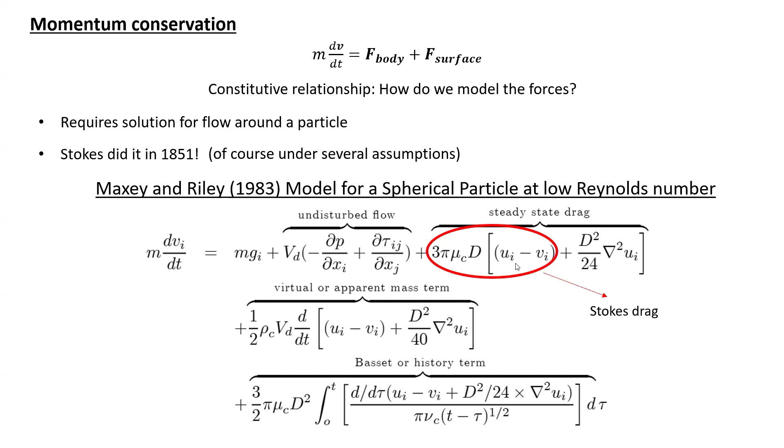In the previous class, we started our discussion on momentum conservation for single particles. We have seen that in the Maxey-Riley model for a spherical particle at a low Reynolds number, apart from the conventional drag force, which is Stokes drag, there are many other terms. So apart from drag and gravity, there are many other terms which influence the particle motion, and they include the force due to the undisturbed flow, then due to acceleration of the fluid, which itself comprises two terms. One is the virtual or apparent mass term, and the other one is the Basset or history term.

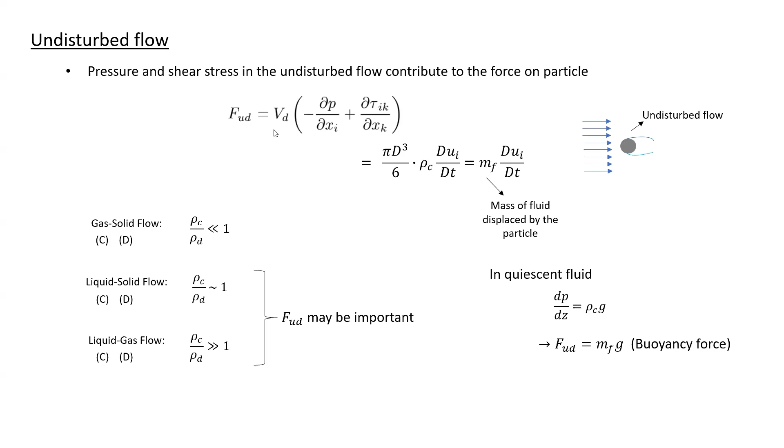So the undisturbed flow, first of all. In this case the gradient in pressure or shear stresses in the undisturbed flow contributes to a force on the particle as expressed by this expression. And here we see that this force is important when the mass of fluid displaced by the particle is important, and this happens when the densities of the carrier phase and the dispersed phase are comparable to each other, or the carrier phase density is much larger than the dispersed phase, for example in bubbly flows.

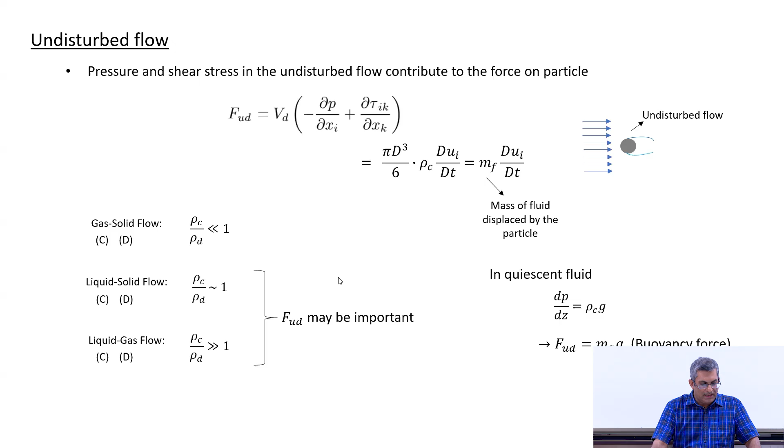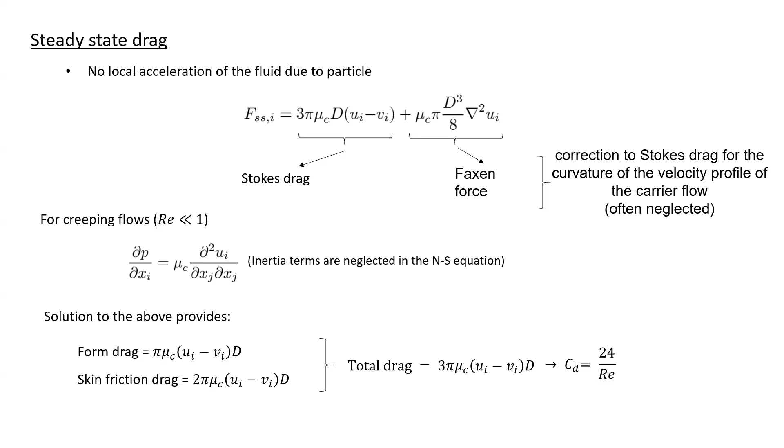Then we discussed the steady state drag. By steady state drag, we refer to a condition where the fluid is not accelerating due to the particle motion. So if, let's say, you drop a steel ball in a liquid, then as it moves down, it causes acceleration of the surrounding fluid. But here we are assuming that there is no such acceleration, and the steady state drag basically depends on the relative velocity, where u refers to the velocity of the carrier phase where it is not disturbed. So here we are not considering u in the boundary layer, but outside the boundary layer.

So for example, in this case where the ball is dropping in the liquid, the velocity can be considered as 0 because the liquid is not moving, but in reality it is not true. Some of the liquid is actually moving. So this is the steady state drag. Although we have Faxen forces which correspond to the gradient in the velocity profile of the carrier flow, this is often neglected because the particle size is much less than the length scale over which this gradient is significant.

From the Stokes solution, we can show that this drag is equal to 3 pi mu times the relative velocity times the size of the particle, and the coefficient of drag is equal to 24 by Re, where the Reynolds number is much less than 1. Only for this case can we solve the Navier-Stokes equation after simplifying it, and show that the total drag, which consists of the form drag and the skin friction drag, is equal to this. So the drag coefficient is 24 by Re, as we have used earlier also.

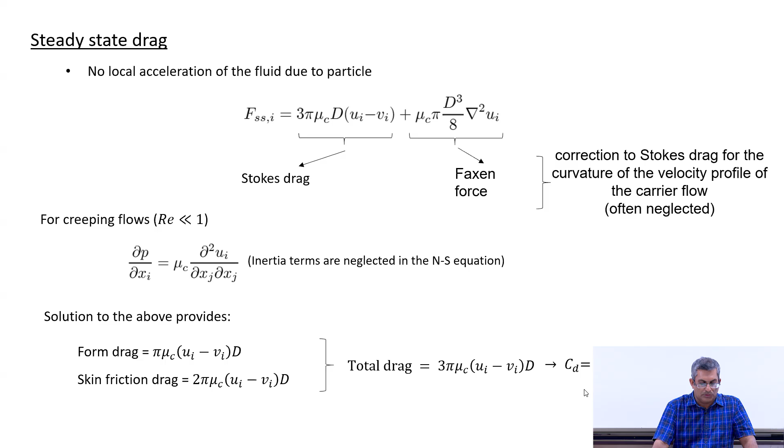Next, how do we correct Stokes drag? There are various factors which influence the drag. So how do we account for that? For example, the Reynolds number effect: the equation for the drag force that we have just discussed is valid only for the low Reynolds number case. So what happens if we have a high Reynolds number? In that case we can introduce a correction factor to the coefficient of drag. Various models are available depending on the range of the Reynolds number.

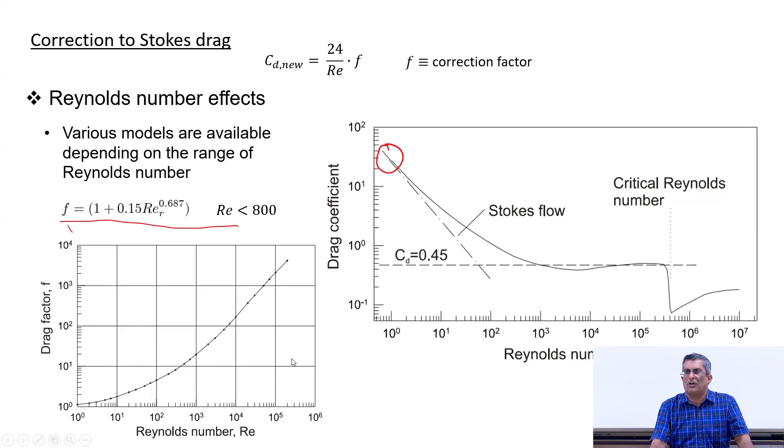So obviously when we have low Reynolds number, then this tends to be 1, but this correction factor increases as we increase the Reynolds number. Now this is about the Reynolds number effect, but before we move on, it is important to look at this parameter known as terminal velocity.

So what is terminal velocity? I am sure you would have encountered this earlier. This is basically the final velocity attained by a particle when it falls in a quiescent fluid. So what is meant by final velocity? Consider a particle which is falling in a quiescent fluid, the velocity of the carrier phase is 0, and one particle is simply falling under gravity.

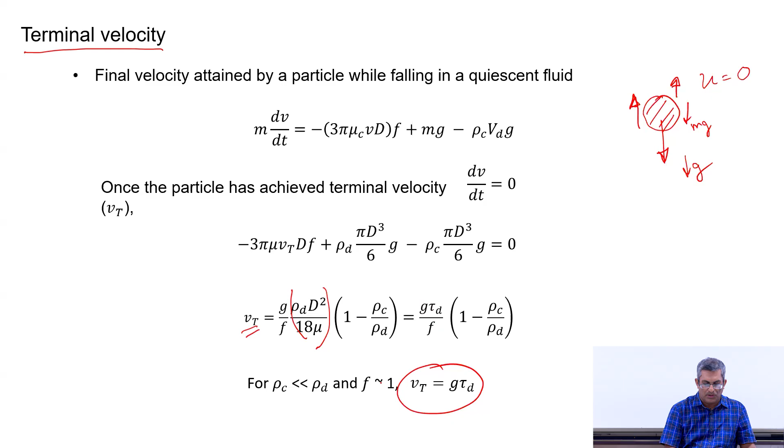Next, there are various other factors which influence the force on a particle, and we take that into account by this correction factor. We have seen that the correction factor for the drag coefficient depends on Reynolds number, but apart from Reynolds number, which other parameters influence it? That is what we are going to discuss. If we get an appropriate expression for the correction factor, we can take that effect into account. So first, effect of turbulence.

If a flow is turbulent, the turbulence itself will affect the drag on a particle, which we didn't take into account in Stokes drag. The question is, under what condition will the turbulence effect be prominent? There are basically two parameters which influence this. The first one is relative turbulent intensity. We'll discuss particle turbulence interaction later in this course in more detail.

The first parameter compares the typical turbulent fluctuations. You can consider u dash as the standard deviation of the velocity at any point, which represents the fluctuating velocity. And you normalize that with the relative velocity between the particle and the carrier phase, which we also call the slip velocity.

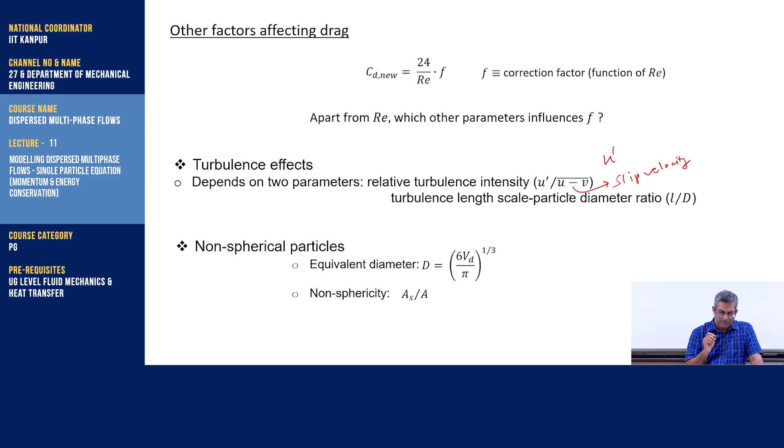factor in case of turbulent flow is that you have a spectrum of length scales and time scales, which are basically corresponding to eddies of different size. You have large eddy, you have small eddy, and the eddy size reduces. Okay, the smallest eddy is called Kolmogorov eddy. Okay, and the large eddies scale with the geometry of the flow.

So now the ratio of the length scale of the eddy to the particle size is another parameter which also affects how turbulence would affect your flow. So if the particle size is much less than the smallest eddy length scale, for example Kolmogorov scale, this means that the effect of turbulence might not be significant.

But if the particle size is scaling with the large scale eddies of the flow, then you can have an effect. So for example, if we consider a jet flow, if you have particle size which is comparable to the radius of the jet, then the effect of turbulence will be significant. However, there is no generic model which would describe this correction factor for all cases, because it depends also on the ratio of particle size to the eddy length scale.

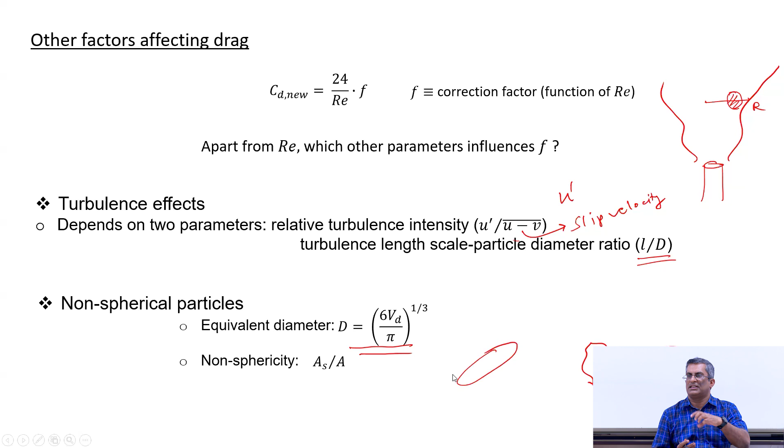And also the other parameter is the degree of non-sphericity. You can do that as far as the degree of non-sphericity is close to unity. The degree of non-sphericity is how much it differs from a spherical particle. Let's say you have a disc shaped particle. Then the straightforward use of Stokes drag will cause error, so you need appropriate correction factor for that.

Next, particles may rotate also. When they are transported by the carrier phase, the particles may rotate, and would it affect the drag or not? The answer is yes, because it affects the boundary layer. But much less information is available on drag coefficient of spinning particles, mainly because of the difficulty in measuring the drag coefficients and quantifying the spinning rate, so that you can validate the models.

So we can define a non-dimensional spin rate. The numerator is the tangential velocity of the particle at its surface, r omega. If we compare that with the slip velocity, and if this parameter is of the order of 1 or more, then we have to account for the particle rotation. In this case, the correction factor will be a function of this non-dimensional number also.

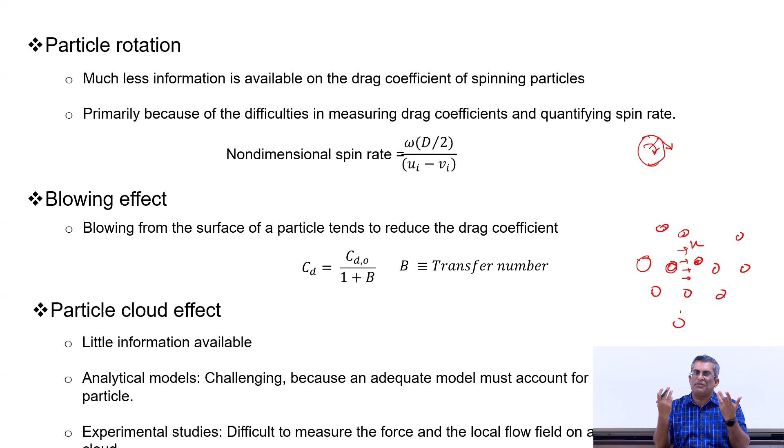So the question is, how far is Stokes drag law valid? This is something similar to the group effect that we discussed in the case of mass transfer from droplets. If there are nearby droplets, they will definitely influence the rate of mass transfer. So similarly in this case.

Now, development of analytical models is challenging, basically because the model must account for the disturbance created by each particle at its surface. And experimental studies are also difficult because of the difficulty in measuring the force and the local flow field of an individual particle.

But we often encounter this, for example, in fluidized beds. In fluidized beds, as we have already discussed, the volume fraction is quite high. So the flow is definitely affected because of the presence of other particles, and in fact that is what causes the overall pressure drop across your bed.

Right now some models are available which account for these effects, and this is incorporated with the Stokes drag law. However, that is one way of modeling this effect. That is not the only way, but one simple way of accounting for all these effects in Stokes drag law.

Okay, so now we'll look at another effect on particle motion, that is the virtual or apparent mass effect. So what is that? Now we will consider the acceleration in the fluid due to the particle. When a particle moves in a fluid, part of the fluid is accelerated along with the particle because of this acceleration.

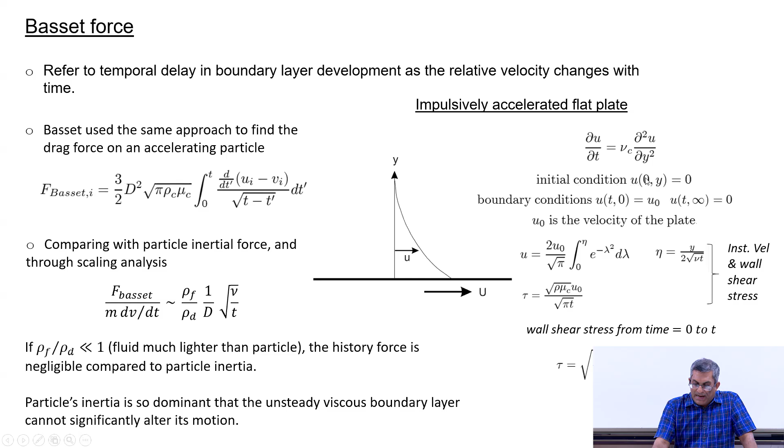At time t equal to 0, the plate is at rest, so the velocity is 0. But for all time instants at y equal to 0, that is on the plate, the velocity is equal to u naught. u naught is the velocity at which you are dragging the plate, and u at infinity is 0, that is, far away you have 0 velocity.

We can solve this analytically, and the expression we get for the flow velocity is this. Here the term eta depends on time and space, and once we know the velocity, we can easily calculate the shear stress, that is, the rate of change of the velocity at the surface. If we do that, we get this term. This refers to the instantaneous shear stress, and what is interesting is this term t here. That is, the shear stress now depends on time also.

Now if I want to calculate the shear stress on the plate from time t equal to 0 to some time, I have to integrate this equation from 0 till that time. If we do that, we get this expression. So what does this tell you? It tells you that the time-integrated shear stress on the plate at any point of time depends on the history of the flow. So this is basically the history term. What has already happened influences your shear stress now. Is it clear?

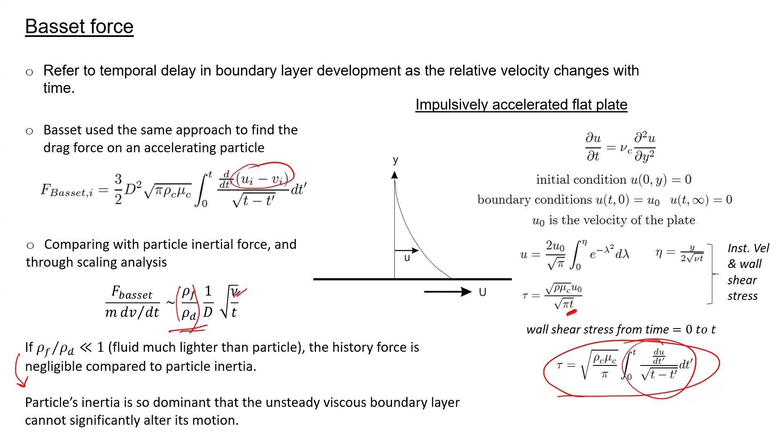But again, if you consider flows such as bubbly flows, or even flows where we have liquid and particle density comparable, let's say solid particles in liquid flow, there also the history term can be important.

Okay, so there are forces other than drag force. Till now what we considered are mainly the forces due to drag, and that's what we see from the Maxey-Riley model. But there are other forces which are possible on a particle, and one such force is the Saffman lift force. What is it? Basically when we have a small particle moving through a shear flow, meaning you have a strong velocity gradient in the flow, then it experiences a sideways force perpendicular to the relative velocity.

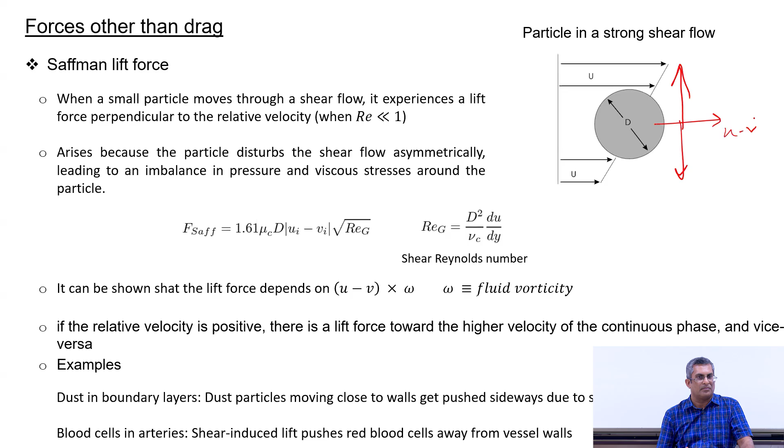Okay, when we have the Stokes flow region, Stokes theory didn't take into account this effect, because in that case the particle was kept under uniform flow. But if you have a shear flow, then it is possible that the particle will get a force in this direction, that is perpendicular to the relative velocity. Now this force basically arises because the particle disturbs the shear flow asymmetrically, leading to an imbalance in pressure and viscous stresses around the particle.

And it can be shown that this lift force, which was first discovered by the scientist named Saffman, is proportional to the relative velocity of the particle, and also you have this term with the square root of the shear Reynolds number, where the shear Reynolds number is given by this expression. So that's how you account for the gradient in the velocity.

Now, we can also show that this lift force depends on the cross product between the slip velocity and fluid vorticity. So this is how you determine the direction of the Saffman lift force. It's called lift force, but its direction is not always in the positive y direction. Now, if the relative velocity is positive, there is a lift force towards higher velocity of the continuous phase and vice versa. So, for example, dust in a boundary layer: the dust particles moving close to the wall get pushed sideways due to shear, affecting deposition.

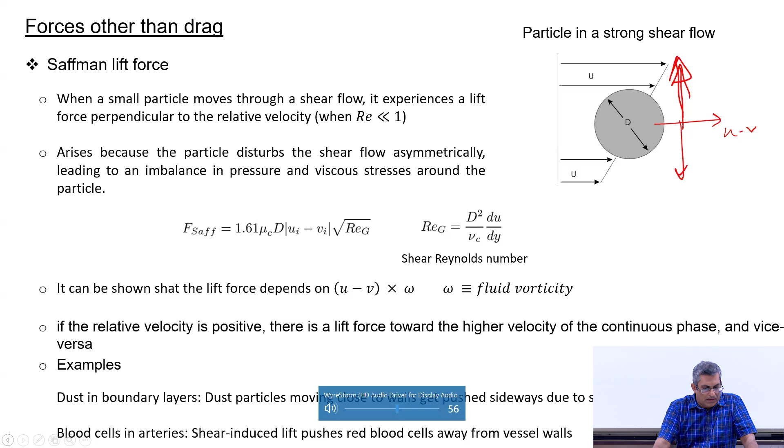Another example is the Magnus force. You are all familiar with the Magnus force if you have interest in cricket. Especially the spinners, they spin the ball, or even in tennis, they hit the ball such that it spins. When the ball spins, a force can act on it and influence its trajectory. So even if initially the velocity is in some direction, its trajectory can change, and this is known as the Magnus effect.

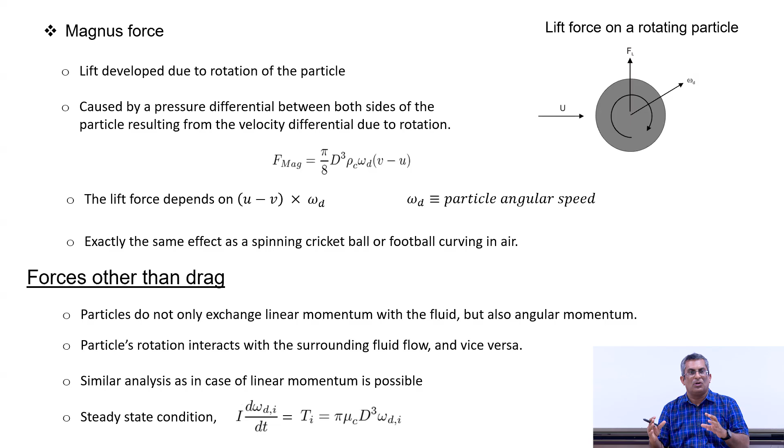So it is also possible to show that for angular momentum exchange between the particle and fluid, we can have an expression very similar to the Maxey-Riley equation of motion. So in this case also you can have contributions due to undisturbed flow and contributions due to virtual mass effect as well as the Basset history term. Okay. For simplification, we haven't considered those.